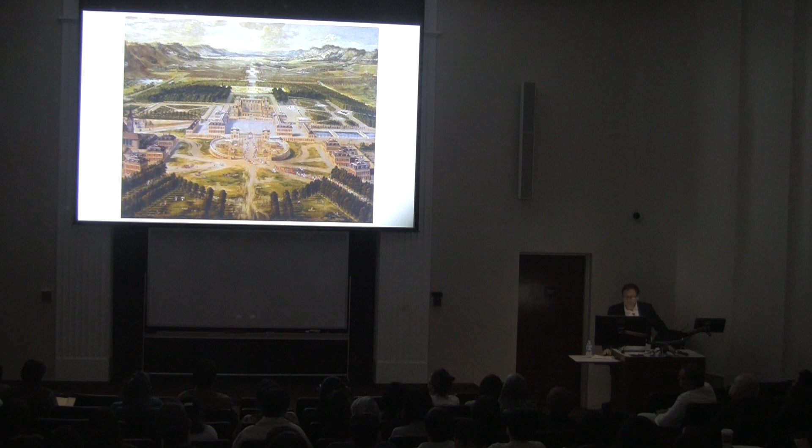This is telling me it's not new, so at that time already it was like that. The garden extends with a path looking to the horizon.

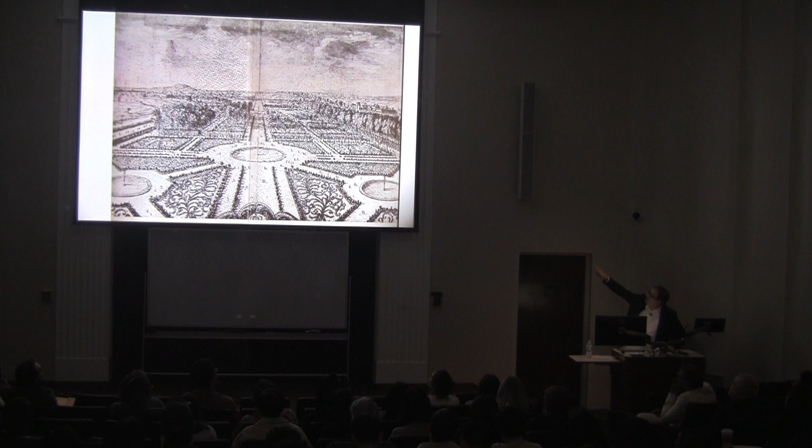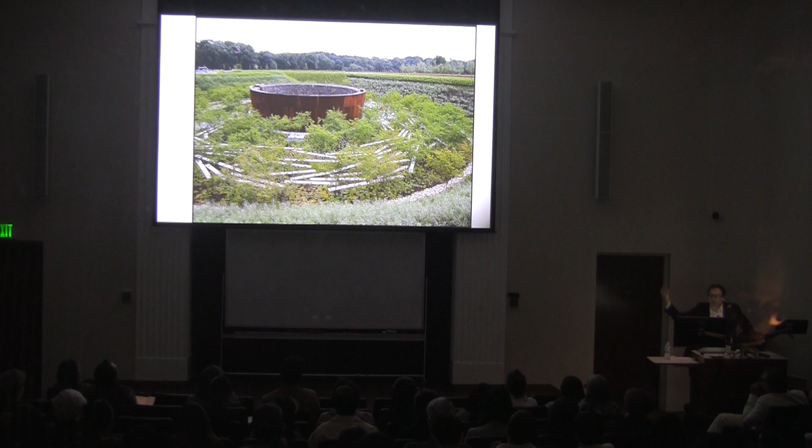5 meters in there. Like a stage - first step down, then a third spiral.

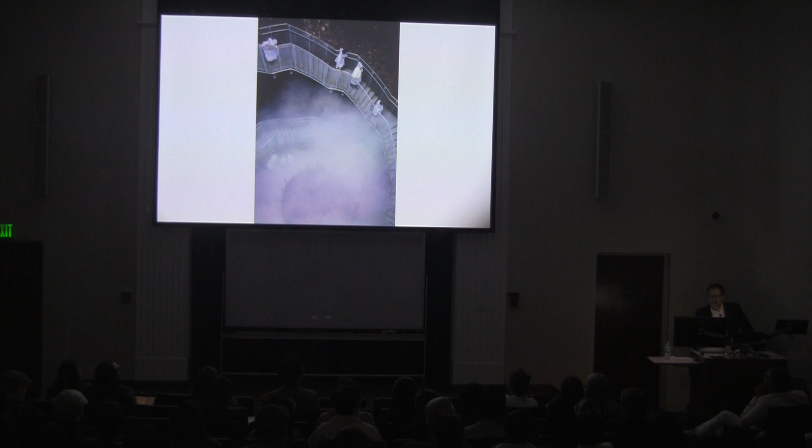Living water, with vapor, damp - sorry, steam - with steam, and sometimes it's like a geyser. So it's really living.

It was invisible, only for people coming for the clinic. Now it's in the public space - it's an event in the public space, a moving event in the public space.

So we were in the underground. Sometimes we have to work not in the underground but in the upper ground, on the rooftop of a building.

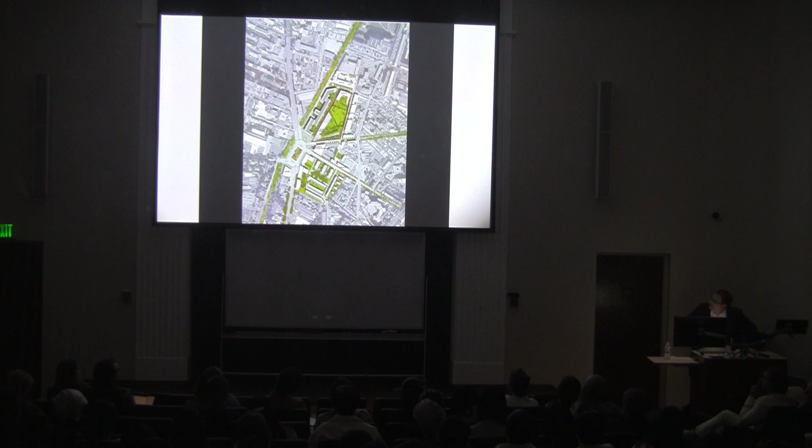It's very dense, there is no park, and the only possibility was to propose a public park on the rooftop of the future shopping mall. So the city accepted this idea, and this is shown in green - this is the shopping mall.

The shopping mall on the rooftop has all the chimneys, the piping systems and everything. So we developed vertical gardens around those pipes and chimneys - giving it a shopping mall inside and a public park on the roof.

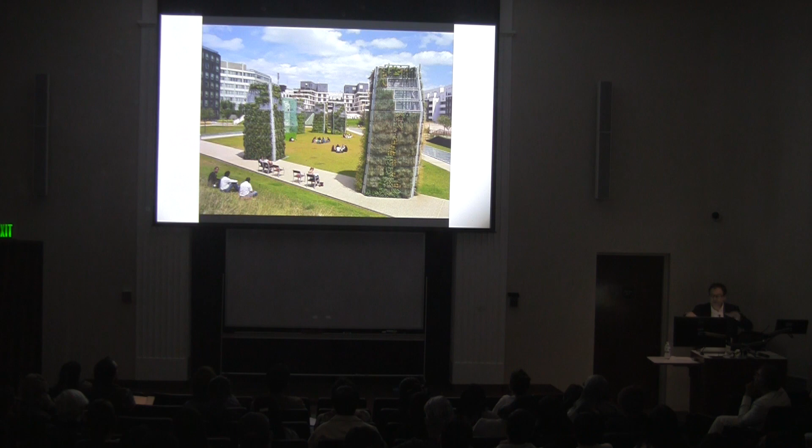For the maintenance, the city has stairs, ramps, slopes around to the streets, totally public, and it works quite well. A few years later, it's still really appreciated by the people living around - quite peaceful, just near the main roads I spoke about at the beginning.

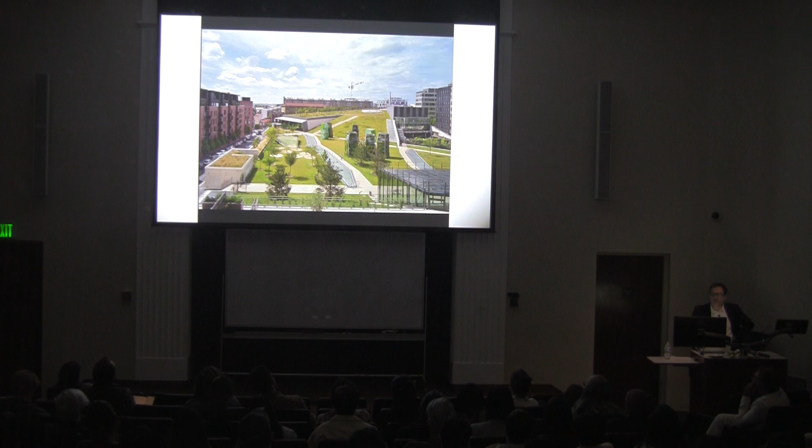So we went around on the upper ground, and sometimes the ground in our city, the open ground, is very important - how could we develop more open ground, more living ground, in new districts.

Take the freeway, the train, so we have a lot of noise. We try to develop the urbanist concept of an inhabited wood surrounded by offices, like a screen against the noise.

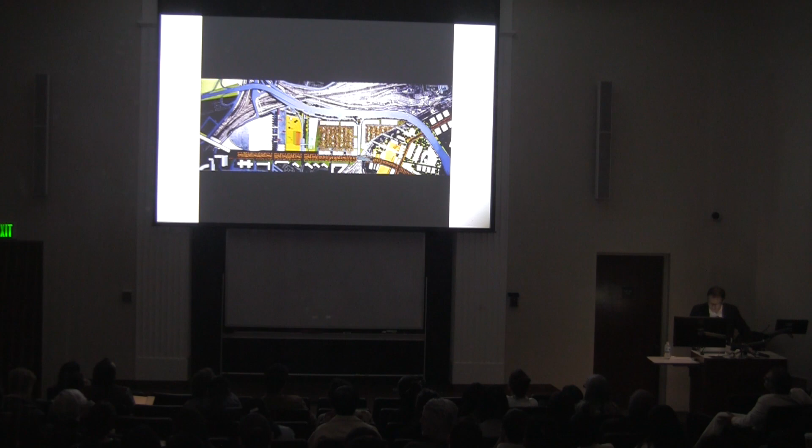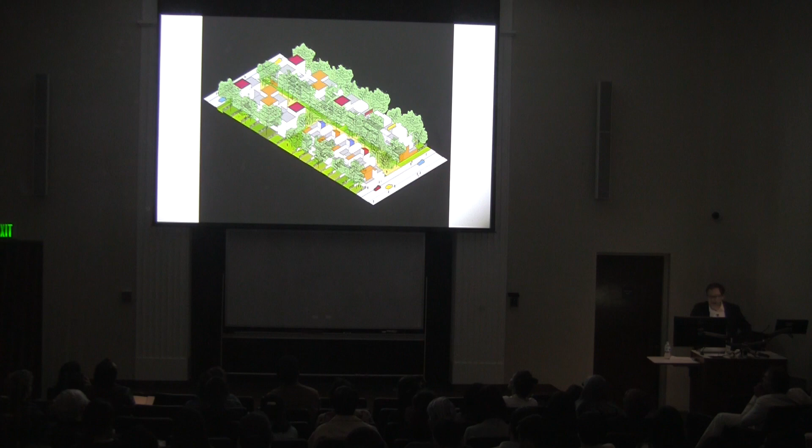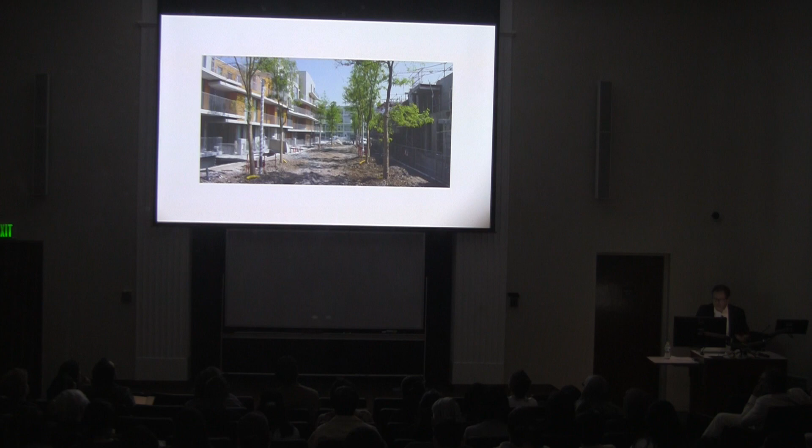Side gardens on the other side, or places - this is the public part, for example. You go out of your apartment. It was during the site construction for sure, so we can understand that only earth and trees.

A green street here, and cross, but it's like there is no road. The road is only around, and for the cars you have the parking in the underground of the buildings, connected directly with the surrounding road.

So this is one side - on one side, the green. On the same side, the connection between this green road and the building, we have like a canal, different bridges to cross and to reach the entries. And this is the other side, the private gardens, with quite a very strong biodiversity on this side.

And it was only a neighborhood district. If we are landscape architects developing parks, we can have, for sure, the park as the place to have a living ground. We develop in the park, even if it's a public park, gardens maintained by inhabitants, nourishing gardens with production. This is one example here.

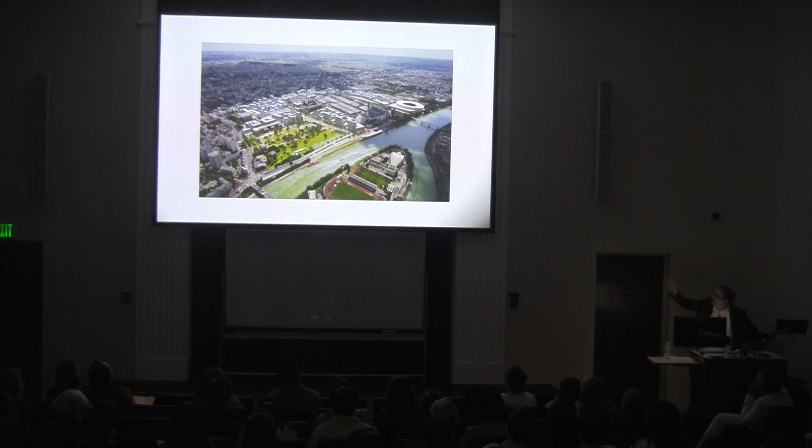Along the Seine River, a park - here it used to be a big industrial site. Now developing a new district, a big park, down to the river Seine.

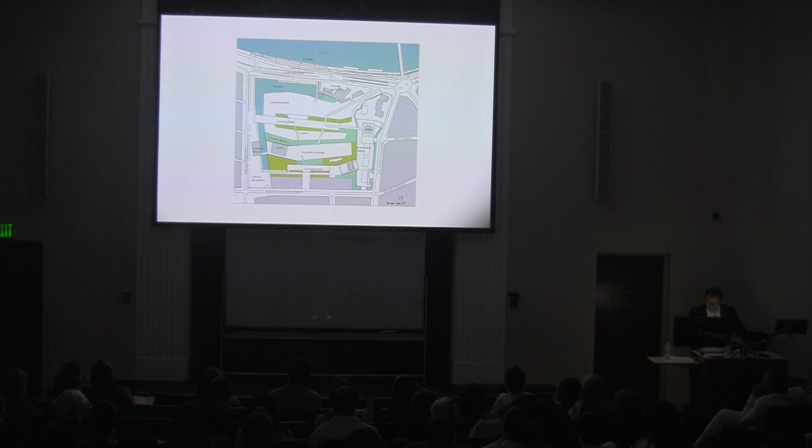Water management is very important, defining different islands in the park. The section for that is important - the play with topography, you will see many sections. That's the base of the way of thinking: how could we transform existing components and organize the biodiversity and the water management through the work on the section.

So this is the district growing around the park. The park started with this water management, near the existing terraces. This part of the park is very biodiverse, like this one here. We do have fields which are like agriculture fields.

And the most important thing for us was to have, from the beginning, gardens for the first inhabitants, even before everything was finished - gardens on the island.

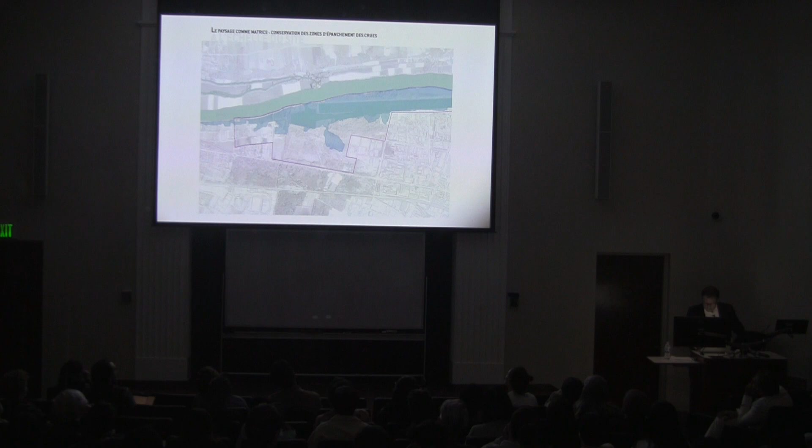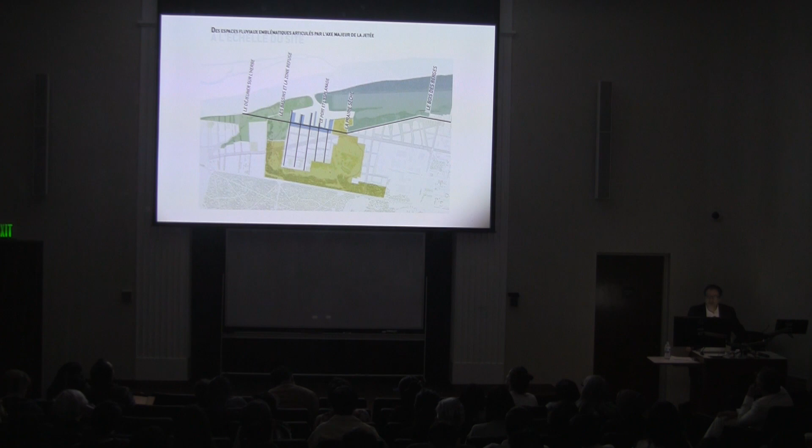That means in the middle you see it's an island. Around it, it's a park - a very natural park. It's not really isolated, though - for sure we have bridges.

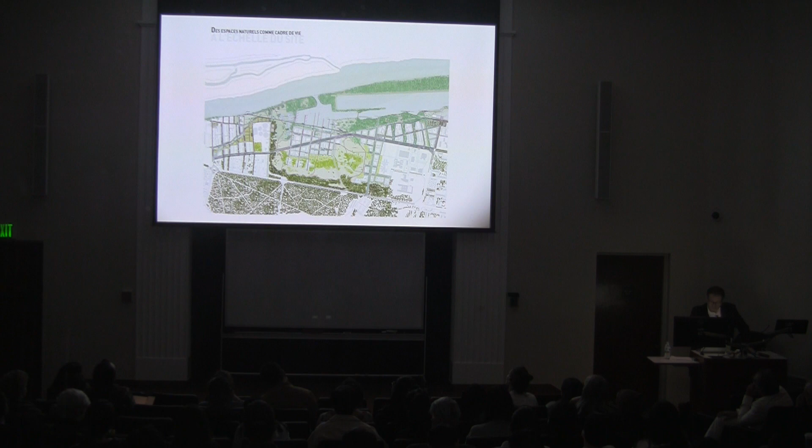But we can deal with this movement, with this risk. And to deal with this risk, we cannot do that alone - as designers, we need to work with the inhabitants. I should say that the mayor and the police were really afraid about this idea, and they were even more afraid about the other idea, which was to have fewer cars than usual and develop a tramway system between stations. But the inhabitants were even more extremist - they pushed the idea in order to have an ecologist district.

It took them a year to define exactly the plan, which was a very good experience. So for the future, we are really okay to work in consultation with the people, with the inhabitants - it brings us many ideas, and they are very, very strong.

Another project is a rain floodable park - this time it's the Parc Billancourt. The flood is not from a river this time, but from rain - it's coming by the rain.

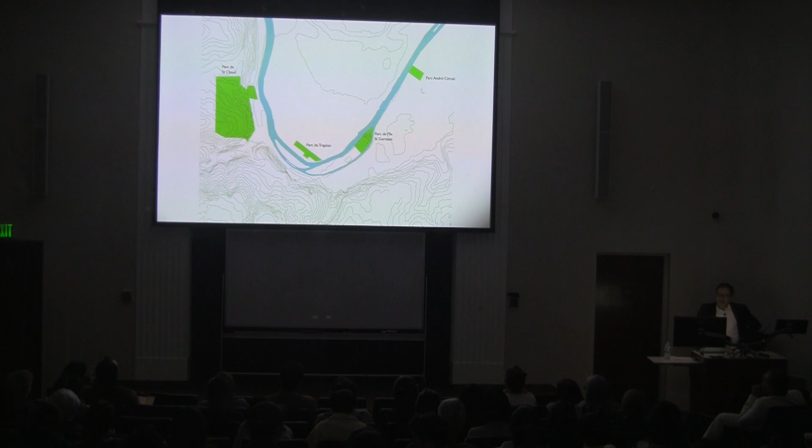So it used to be the former Renault factory, the car maker, French car maker Renault. They demolished the whole site, all the factory, and in the site you see it totally demolished, and now have a park there along the side.

You see all the districts and the cities, or the arrondissements, are organized all around the park. Quite a park.

All the blue points in every one of the blocks are the place to collect the rainwater. The rainwater is guided open air along the streets, the alleys.

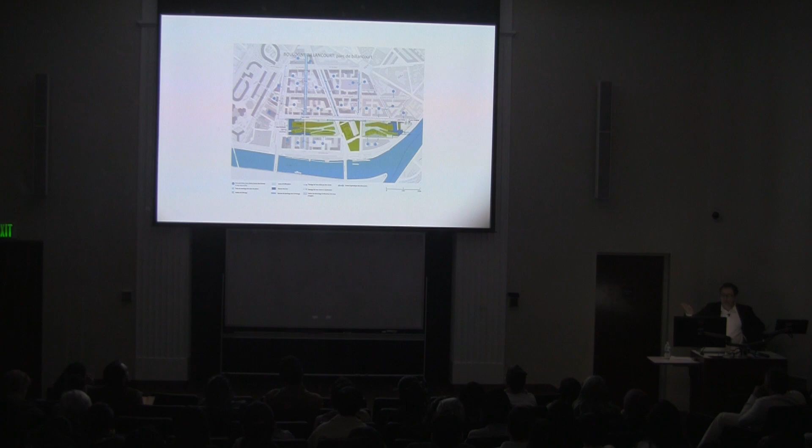If it rains a lot, the park is flooded, more or less flooded. You can see here the section.

So if we have here landscape architectural students and architectural students, we need the section. The section is really the way to think the relationship between the buildings and the landscape, and the climate change is playing a role here.

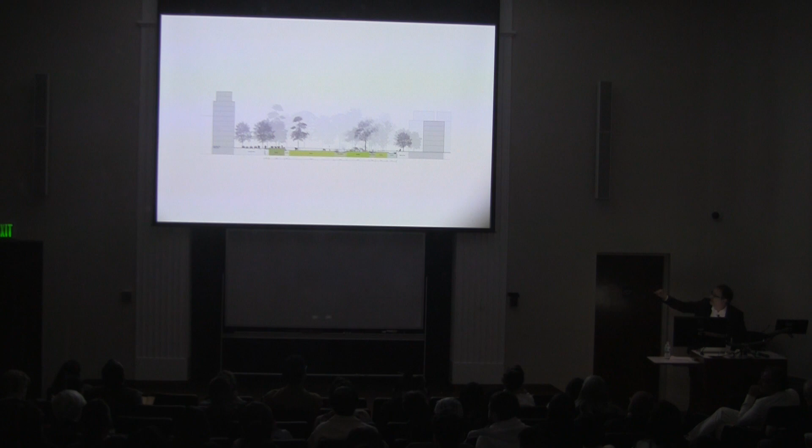So we can understand here that the middle of the park is lifted down in heights with retaining walls. That means the water, we can accept more or less 2 meters high water level inside. That means it's a civil project with offices working together. We have to organize.

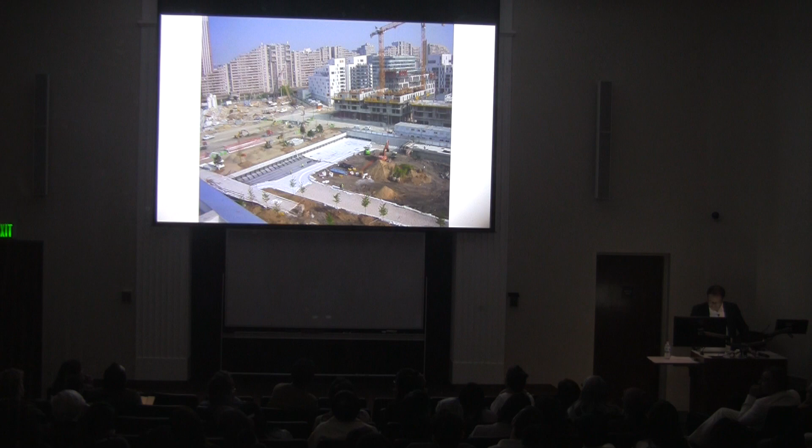It was the first place, the place where the water can go open air, along the buildings, along the two bridges to enter in.

And then the water goes to the park, is filtered, and then the water goes out. Yeah, it's a visual effect, like a threshold to arrive at a building from Jean Nouvel.

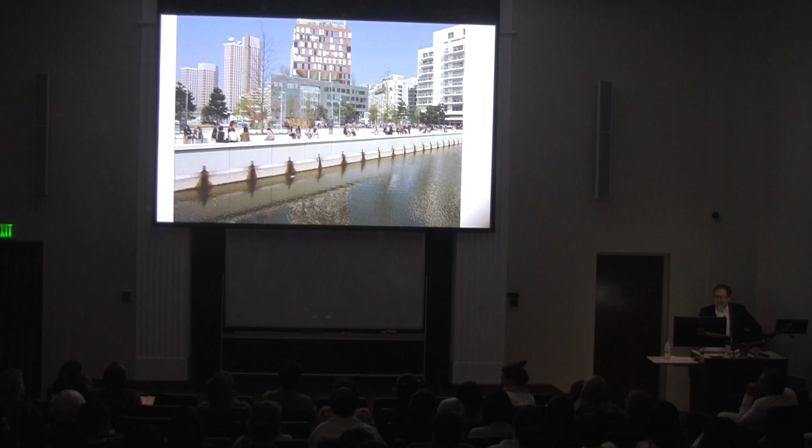I don't know if Olivier used to work on it or not. You were already maybe in Los Angeles at that time. So the park is there from the beginning. Sorry, maybe I moved something. Okay, it's there from the beginning, and the buildings are constructed one after the other.

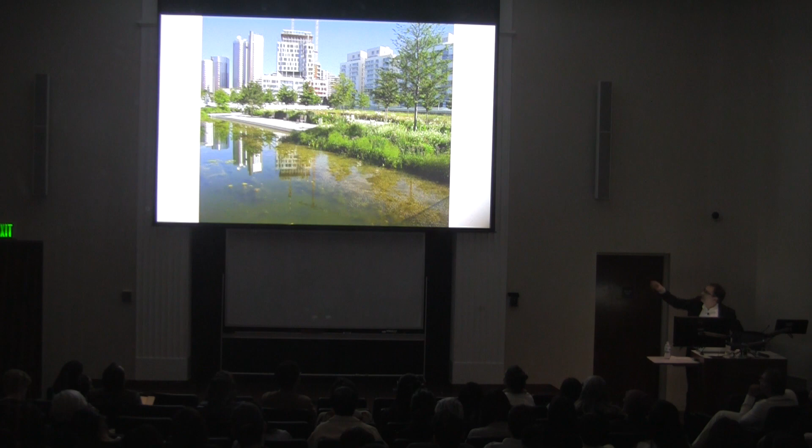Park has centrality again, the same building, Nouvel. We already have the water, the park as a reservoir, like an urban beach. We can maybe say that here.

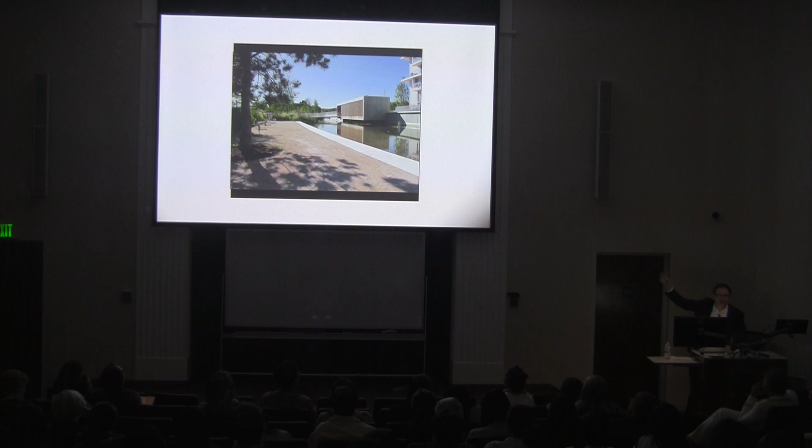The entrance to the park is sometimes like bridges. You have to cross the conciergerie, maybe a house here. Sometimes it's dry because we have many dry areas in the park.

Try to be totally immersed in the green, with zonal effects, and a very chic white party in green. So all the bourgeois from Boulogne are going there. They like it.

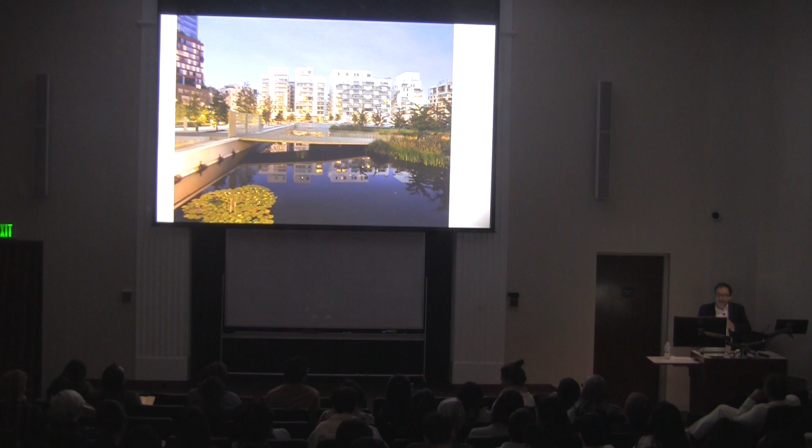So what is controlled through those bridges and everything - it closes it, and if it's closed, it has a visible effect. Oh, okay.

It's important to play with the water even if we don't see directly the water. So, for example...

Maybe I don't have to touch anything. Maybe... Jean Nouvel, where are you? You are.

It's in Marseille. We were asked - so we won the competition with François Leclerc, a French urbanist, in Marseille, to develop the docks. The first question was...

...to see the site. We understand this site, which is directly along the sea, from above.

To go right, and from above, when we are on the top, we can see it. We can see the... Marseille is a bit like a...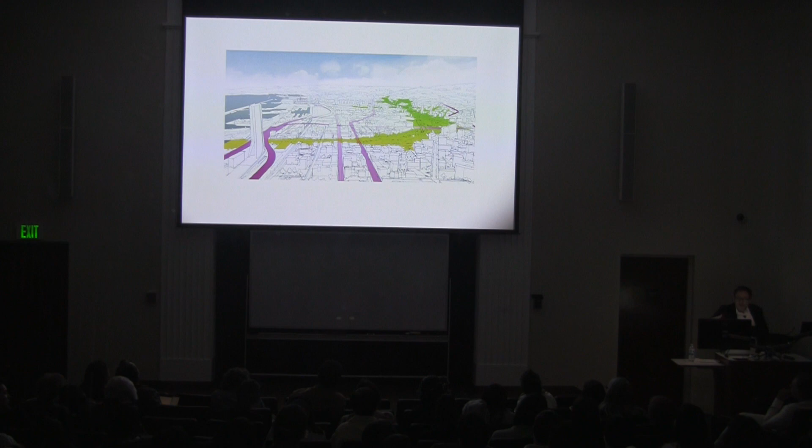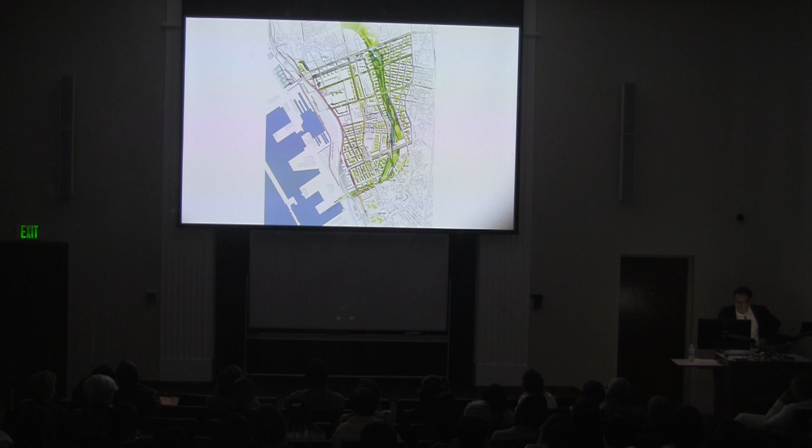And the idea was a park along - the park is the connection between the new district related to the industrial port and the historical city of Marseille as well.

For sure, we have the Lungomare, the pedestrian area, with a belvedere looking at the sea. And in the park, in the normal situation, we have a retaining system to block the water, so a water basin.

When it rains a lot, it's like this - but still in the park, the system is for sure risk management. And a bit like right now, you have the project on the river, so the river project, which is a dry river.

Sometimes with no water - it's the same thing here, but the river is urban. It's a component of the city, but is as well an urban component with the transportation system. It could be a kind of centrality, and not the edge of the city, but a central element.

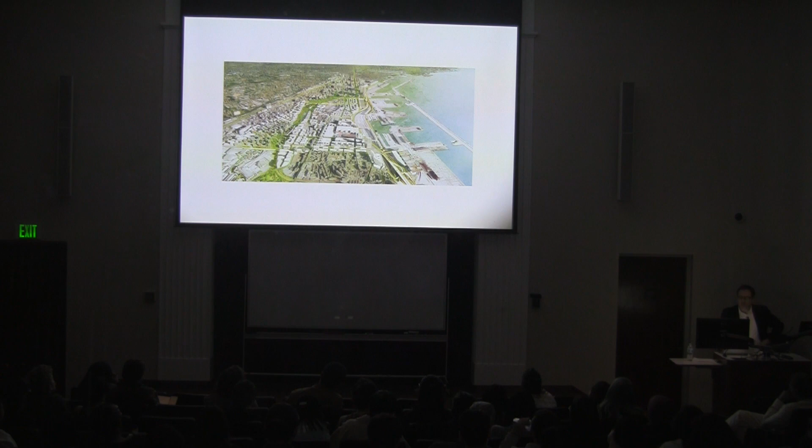In Strasbourg right now, we're landscape architect. We are lead of several - developing the new city center in the former industrial port of Strasbourg, connecting France and Germany.

We are along the Rhine River, and this is really the start of German work. We have the mayor of Strasbourg and Kehl in Germany. It's an existing place, so the water - it's a port, industrial port, from canals.

We have real architecture with different verticals, beautiful, so it's inspired by the context. What is inspiring as well is the Rhine, the different canals.

If you see in the middle of this island, here we have a fringe, so with a lot of vegetation. And 50 years ago, it used to be a canal as well. We can see here in the middle, the white line - it used to be a canal. It was filled up, maybe.

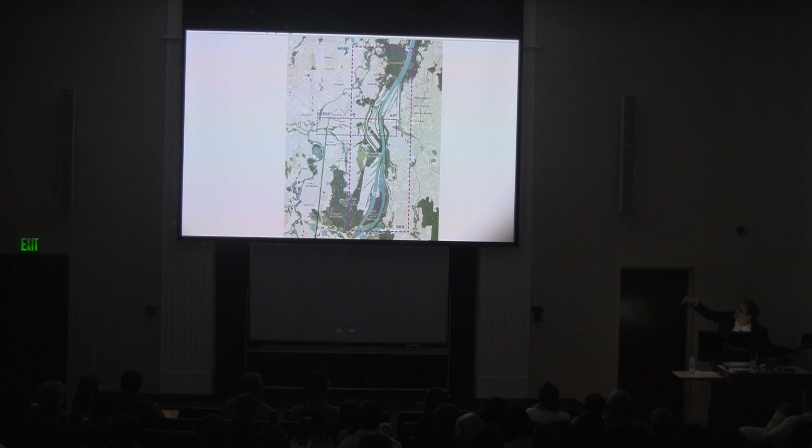So this is the stage of the work. Today we are developing it with the canals, with the green canal in the middle, which is a linear park. It's very difficult because it's still industrial. It will work partly as industry, and partly it will be the extension of the city center of Strasbourg, and the connection with Kehl.

In Shanghai, right now, we won a competition as well to develop the river, 15 miles long. For us, Shanghai is for sure a skyline - you can see it very easily from everywhere - but it's as well a waterline. The river is a waterline. How could we define the waterline a bit better?

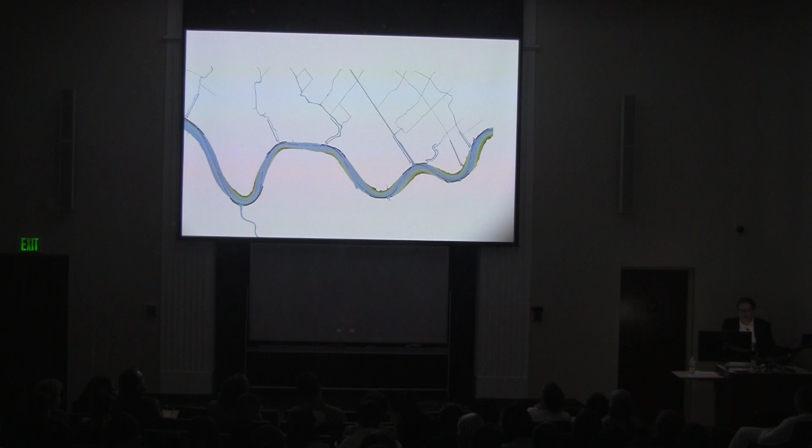Here we have a lot of mud. Every time this river is turning, the mud accumulates, and this mud is very important for us. For example, in front of the Bund, on one side you have the Bund, the historical, beautiful side. On the other front, where we are, on the bottom of the picture, you have the mud and the vegetation and the biodiversity, which is still habitat.

That is not to cancel or to demolish. We need to develop this living ground in Shanghai. So you see it here, the mud, the accumulation of mud. For sure, we don't want to let it stay like that. We have to increase the fertility, so it has to be fertile because it's kind of earth, and the mud as a stratum will be like this in the future.

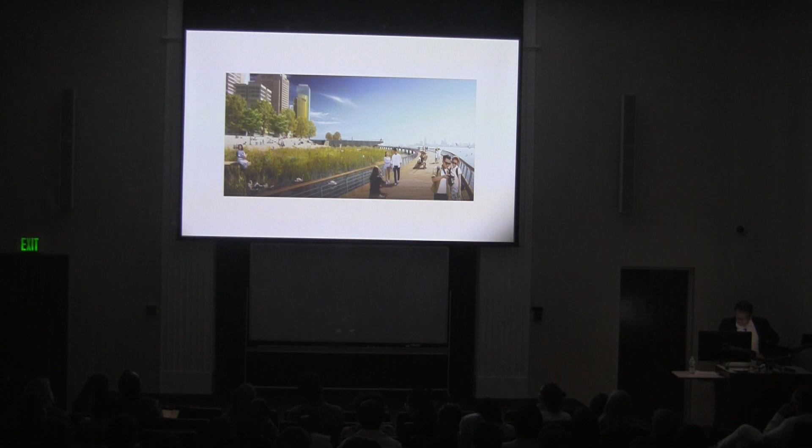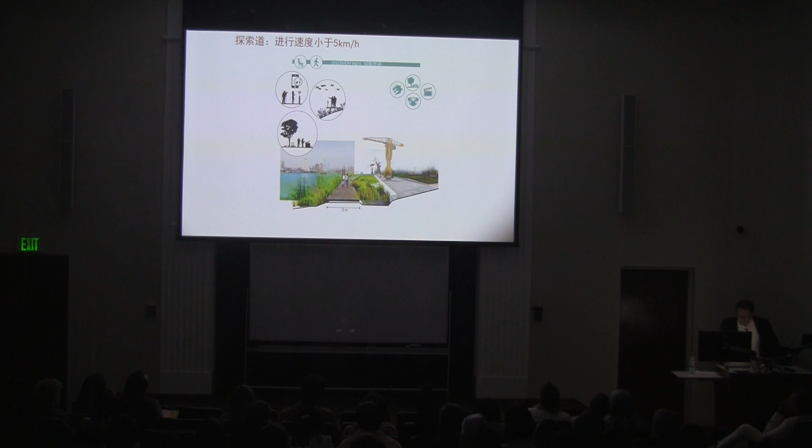So with different pedestrian bridges along, with different speeds - a slow one directly connected to the water, in the middle one for sports, and then the faster way. So these are the different types: this is the slow one, the middle one, and the very fast one here at the end.

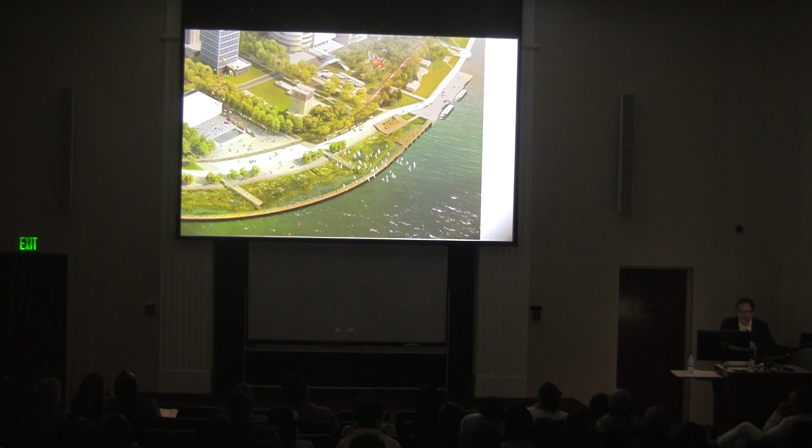And we are now developing this in Shanghai as well. So we are developing this project. One more time, Jean Nouvel is constructing the new museum. So here we are still - it's a rendering, but he will build it along the park here.

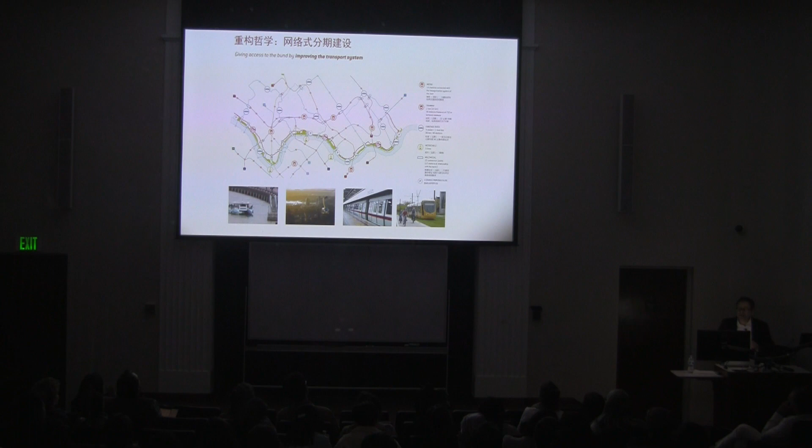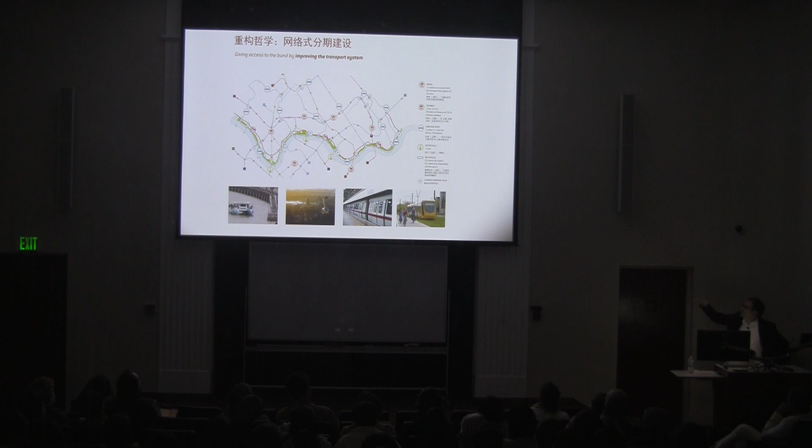And it's quite a fantastic project for us to connect different parts of the city of Shanghai with the help of a transportation system. It's not only the living ground; it has to be thought of as a centrality, meaning a connection point for all public transportation. And with, for sure, how about at night - lighting, so how could it be by night? We are working with different offices for those different subjects.

And then, at least, last but not least, how could we create urban intensities with those ideas of living grounds in the city? Sometimes in the middle of the city, not in the periphery, not only along the river - for example, but sometimes really in the middle of the city, like here in Barcelona, Glòries Catalanes, the urban canopy.

We were selected to realize this, here along this Barcelona, the very well-known Diagonal avenue. But this is a crossing point, a cross point between the Diagonal and the former canal, which were connected to the Besos River.

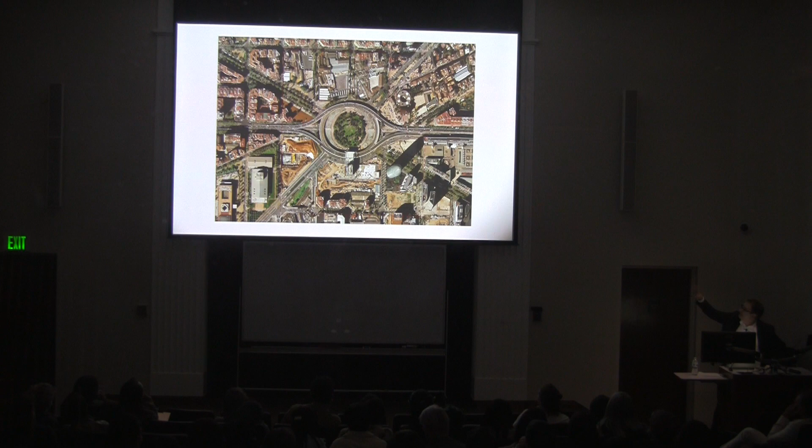2 years ago, the city of Barcelona took the decision to put this big ring, so to demolish all the structure, all the infrastructure, and to have the road in the underground. That means we don't have this kind of picture anymore. We will have, this is our project now, a big park in the middle of the city.

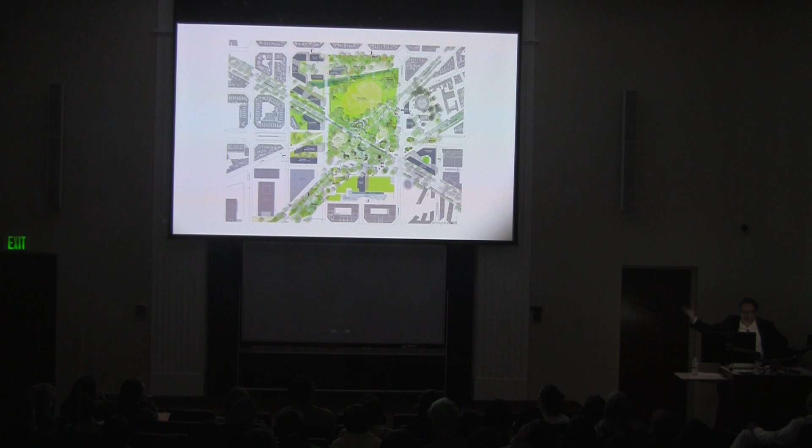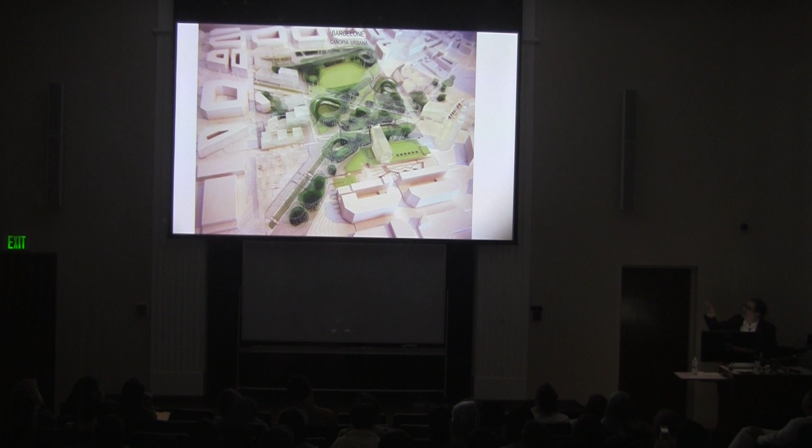So our answer is not exactly a park, more a plaza, but it's urban park. Because in Barcelona, what do we need? They do have many beautiful plazas, but here we need, for example in summer, coolness. We need to lower the temperature. We need a canopy, and that was the idea here, to develop the canopy, to develop the biodiversity, with the porosity, to be there in the middle of the city, even in summer.

So different sections, even if it's very easy, has to be with continuity. One on the top, then need the canopy or green roof canopy. And then we need the nodes, we need holes in this canopy in order to have ventilation, a natural ventilation system. So that we work between the stratification, adding the infrastructures in...

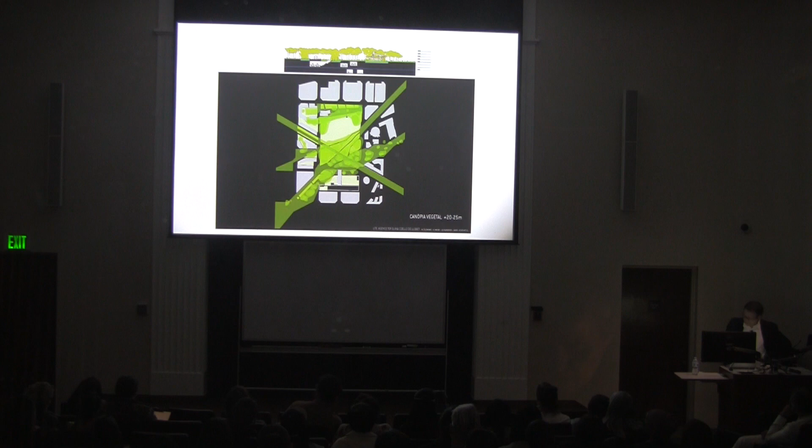Olivier, I need your help. It's your computer. It's not. Perfect.

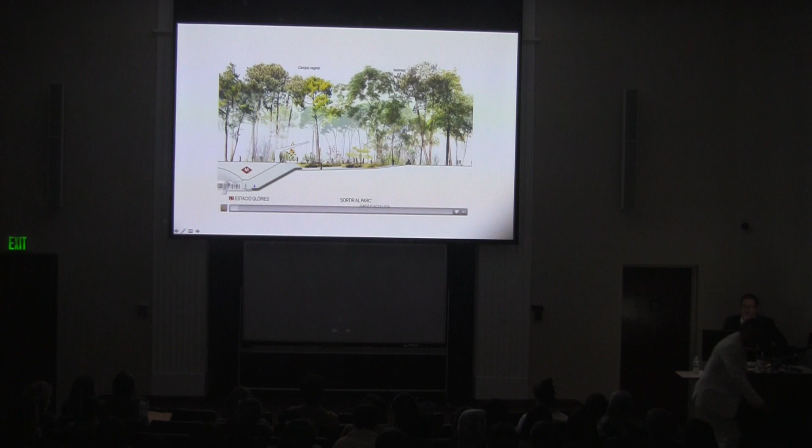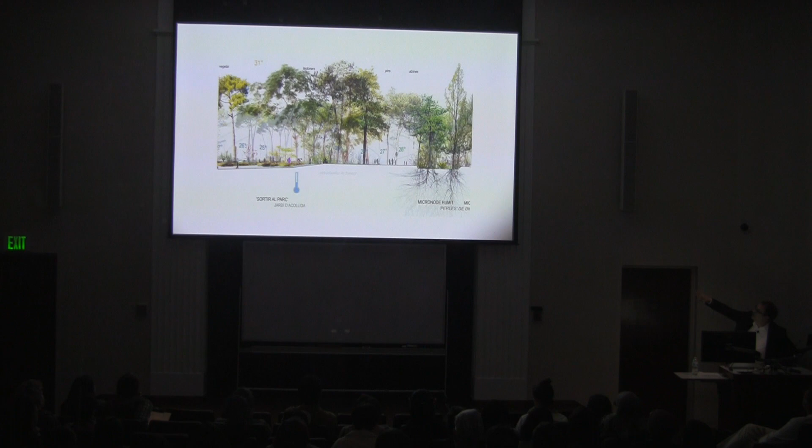And this is so we are in the metro station. We go out of the metro station and reach the park level. So the temperature is lowered because of the canopy, the birds, so the biodiversity, the nodes are playing an important role for sure.

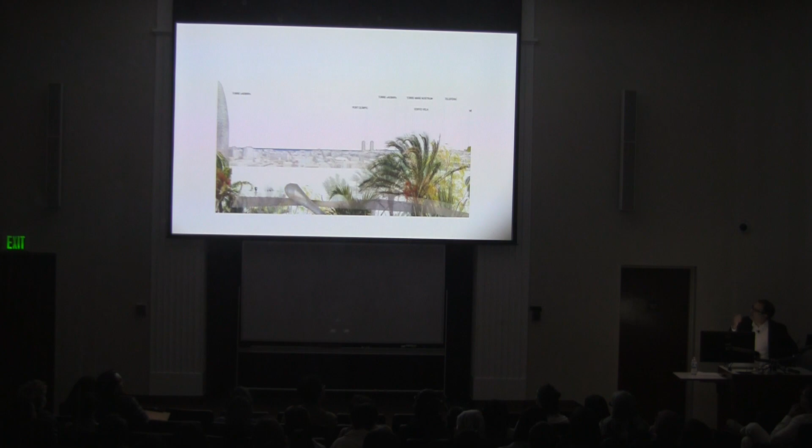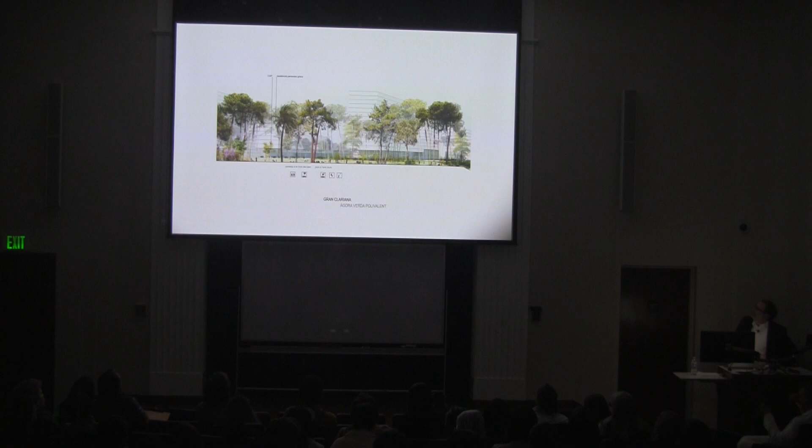...stand in a city center. Last project tonight is...

We are trying to adapt. We are working with stakeholders, but the idea is for us when we saw this, it's not a plaza. I cannot recognize a plaza there. It's too complicated, too many walls. It's a lifted up space with a lot of stairs. We need a bit more simple.

To attract people to the place, and when we saw a picture of the same place from 1919, it is totally flat. It's very easy to reach. You have trees, you have biodiversity in the middle of the city. You have shops, restaurants. It's quite nice. It was really the reference to develop here, and the question was, is it possible?

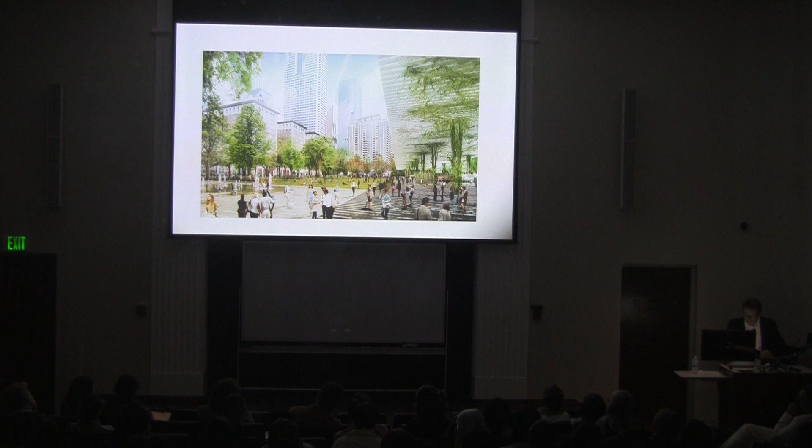We will be able to capture the water, the rainwater. So we have a reservoir in the parking, and in the middle, a kind of plaza which is a hybrid system, kind of park and plaza for everyone, and constructed canopy with different boxes.

We will have restaurants, cafes. We could be on top of those boxes to have like a balcony looking at the plaza. So it's an ongoing system, not finished for sure. We are working, as I said, with different local offices, and it's very fantastic for us to open this small office in Los Angeles to work here and develop this living ground in downtown with a social component for sure.

Under the natural canopy we do have gardens, thematic gardens. We have to work with the inhabitants to develop exactly what they need in those gardens. The idea is as well to organize a better connection with the Biltmore Hotel, to point out the lobby of the Biltmore Hotel.

You know that the lobby is not anymore looking at the plaza, but it's on the other street, because the plaza has a bad shape today, and we would like to bring back the lobby of the Biltmore to the plaza with a water basin, with the new entrance of the Biltmore.

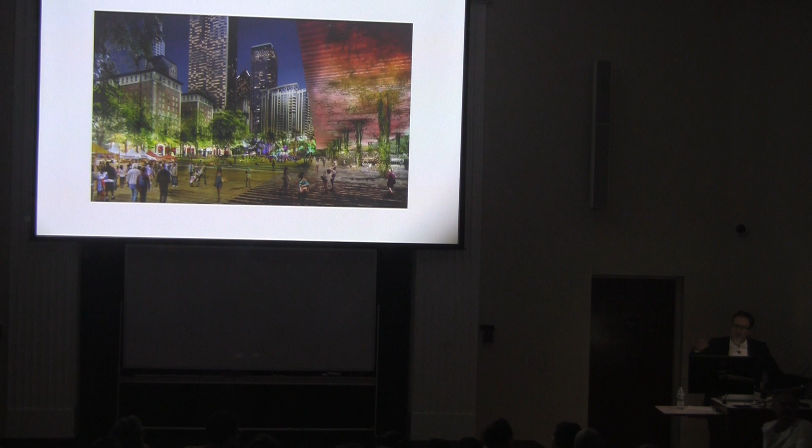Yes, that's very important. I was too fast explaining this project, but it was an existing shopping mall, so we thought that this shopping mall could accept a top.

So we were okay with it. Then, architects and promoters—for the winners, we asked them to finance it. So it was a condition: you are the winner if you accept to finance the public park on the rooftop. You finance it, I maintain it as a public manager, and they accepted that.

We developed it together with the shopping mall. After it was together, we asked the architects, could the rooftop not be a horizontal one? There's a shape on the roof, and they totally agreed. It was really a dialogue with them. So not only the biodiversity and the climate—humidity and everything you mentioned—but even the shape was really done together with the architects.

We needed to, even for the stairs and the ramps and everything. At the end, it's one project, totally private—the private realized everything. The private manages only the shopping mall, and the public maintains the top, the rooftop.